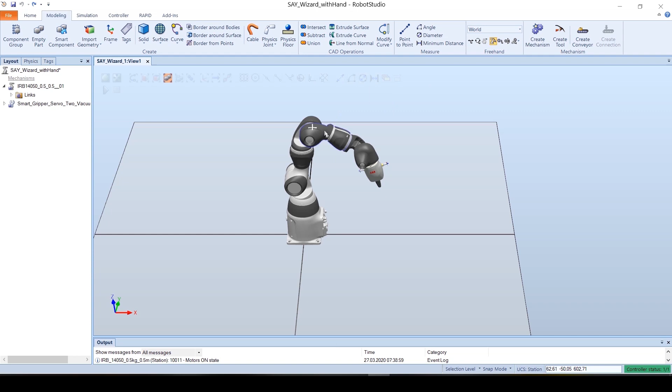Now we insert the move block a second time and create a new location. This time we move the robot to a new place. One option to do this in Robot Studio is to go to the Modeling tab and select Jog Joint. Now you can move each axis of the robot. Click on the axis, hold it and move the mouse.

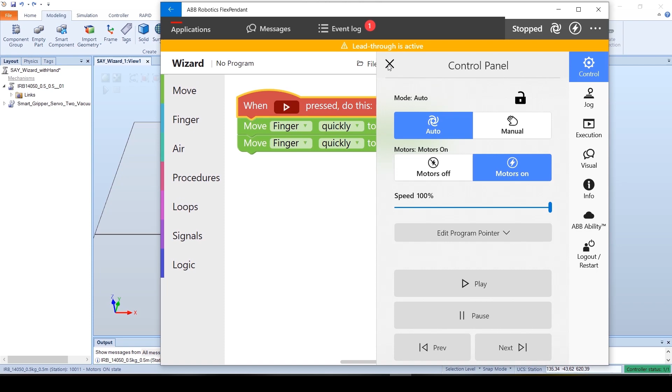Store the position and click on Start to test your first program. If the motors are switched off, go to the 3-dot button on the top right and switch the motors on. Press Start again. Click on Robot Studio to bring the window with the robot to the front.

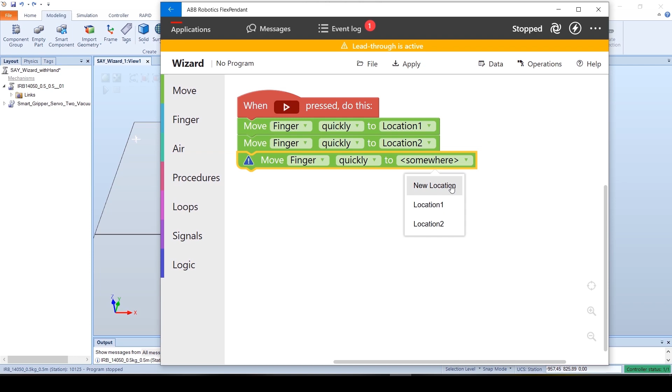Don't minimize the FlexPendant app to stay logged in. Go back to the FlexPendant to stop the program. Insert a third move instruction to extend your program. Bring the robot to the next position.

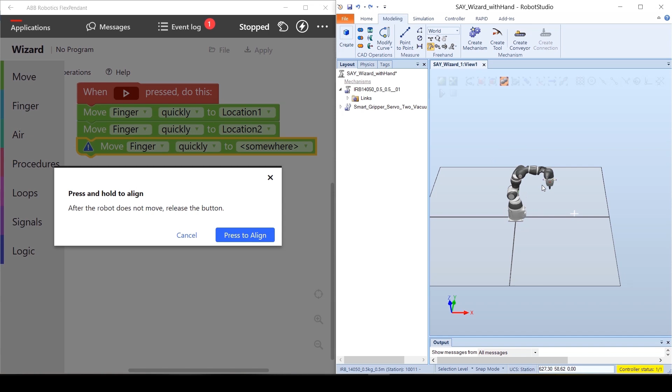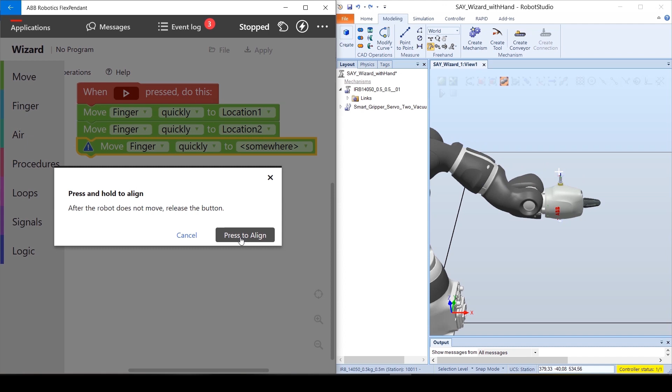Click on Align. Make sure you can see your robot. And press Align until your robot is aligned to the floor. If you are close to a position parallel to the floor, it will also align parallel to the floor. Go back to the FlexPendant, save the position and press Start to run your program.